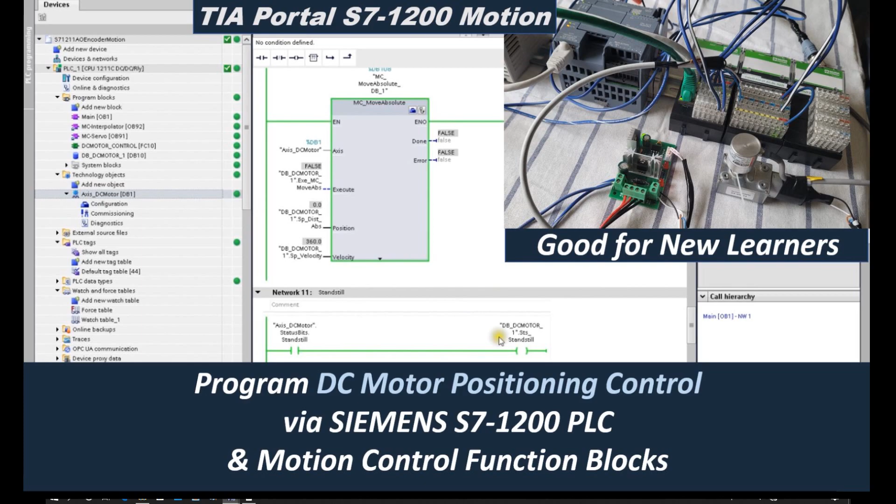By using the analog output for DC motor and encoder feedback, and I'm using the Siemens small controller S7-1200, this small controller. And in this test, we do not need any other technology, hardware, or module. We just use this S7-1200 CPU, and it has a built-in HSC high-speed counter. And we are using the analog output to control the DC motor.

So in the previous video, I used around 10 to 20 minutes to explain how this hardware looks and how we quickly build up this axis, this hardware configuration. And I'm using this analog QW100, one channel, 0 to 10 volts, and this analog signal goes to the PWM driver board. And the driver board connects to the DC motor.

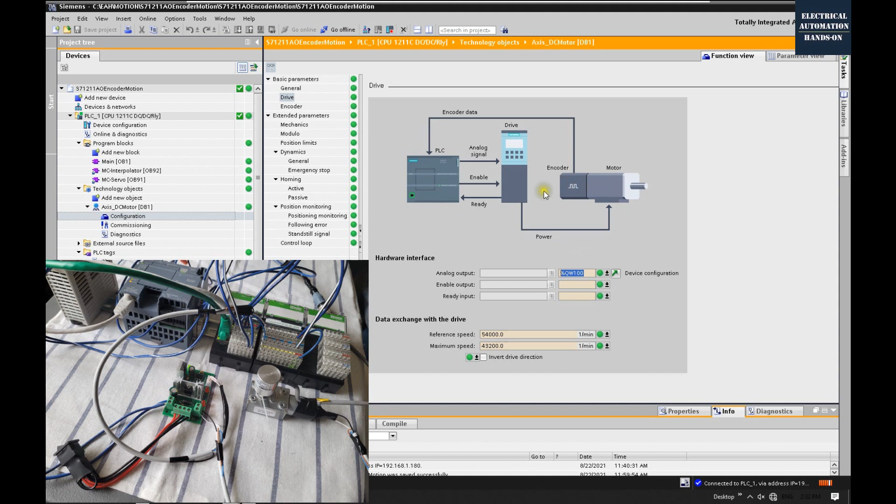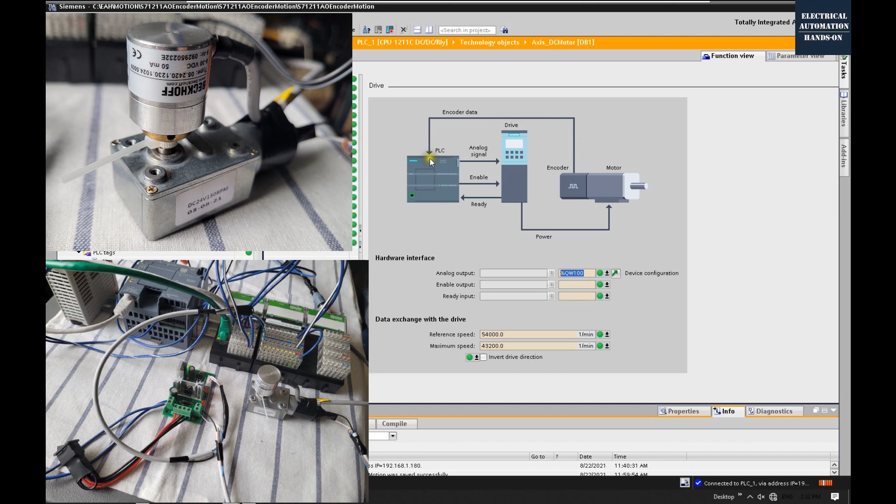And then to measure the speed and the position, I'm using a very simple incremental encoder. And I'm using A and B, two channels connected to two digital inputs of the PLC. And to read the encoder value, I'm using the HSC1. I set the encoder as A and B counter, using input 0.1 and 0.0, A and B, two channels. And I can read the speed and the position.

Also, I briefly showed how we can tune the gain parameter. That time, initially we started from 10, increased to 40, and then went back to 38 or 36. So basically, we briefly and quickly set up this closed loop positioning control.

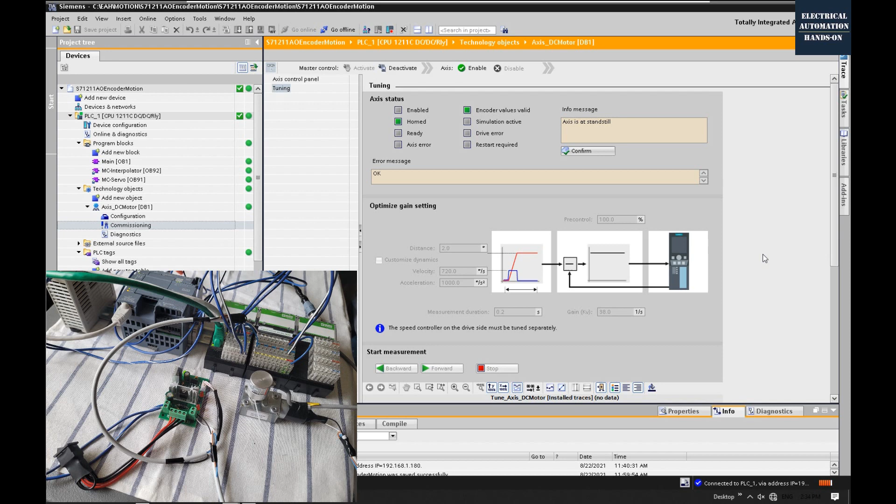And if you have this controller at home or in your shop, you can quickly build up this controller and DC motor system, or maybe you have a VFD in hand and you can use the same idea: analog output connected to the VFD, use the induction motor, and use the encoder to read the induction motor position feedback after the gearbox or after the shaft, right? So you can quickly build up this positioning control.

And after we build up this axis configuration, and after we use this control panel to jog and do relative or absolute positioning control of this motor, we verify if the motor can travel in the correct direction and to the correct position as well as the velocity. Then we can use MC function blocks to enable, home and jog as well as velocity control or positioning control. So we will use the program.

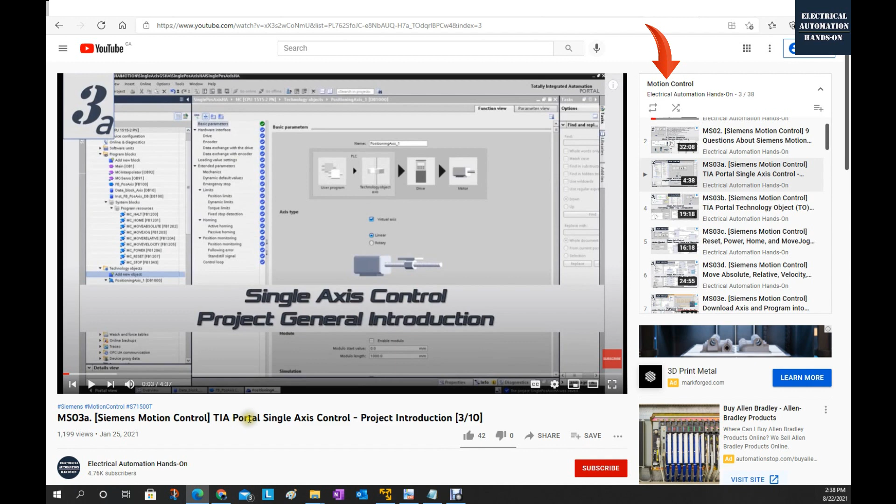And in this video, I will briefly show how we can do that. Actually, I made one video before that shows in detail how we can set up the function blocks. I explained it in detail. In this playlist, I have almost 40 videos. It includes Siemens motion control, Allen Bradley motion control, and Beckhoff TwinCAT motion control.

If you are a new learner trying to get a rough idea of how we can use the Siemens small controller to set up closed loop motion control, this video is a good fit for you because I will briefly introduce how we can do that, step by step, hands-on. Alright, let's go step by step.

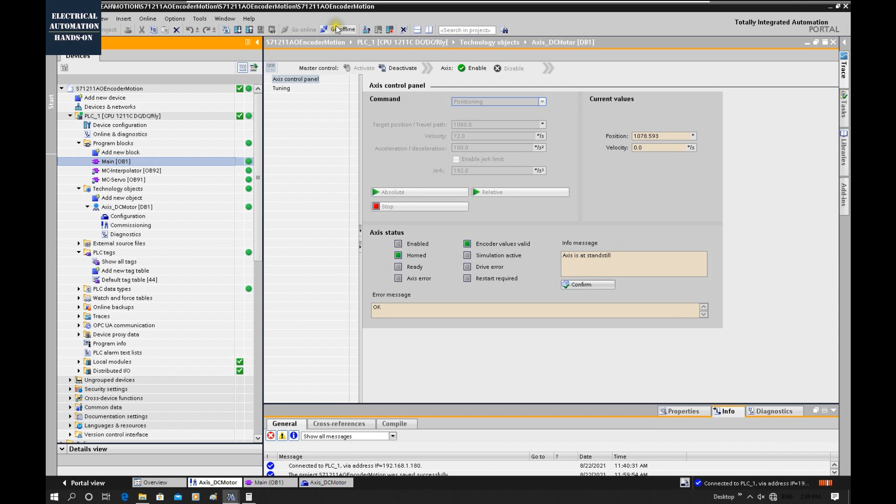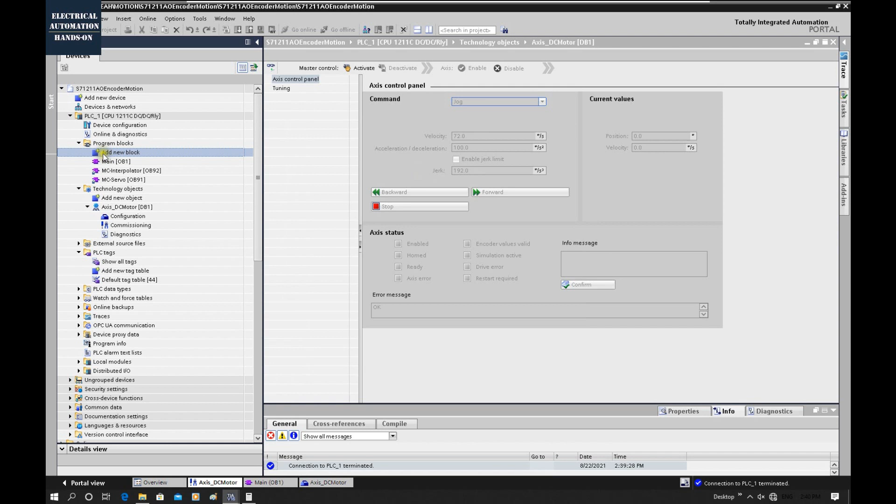So go back to our project. Let's go offline first. And let me first set up one FC. We can quickly set this up. Name it DC motor control. Okay. This is the FC. Okay, we set up this FC, and don't forget to call this FC from OB1.

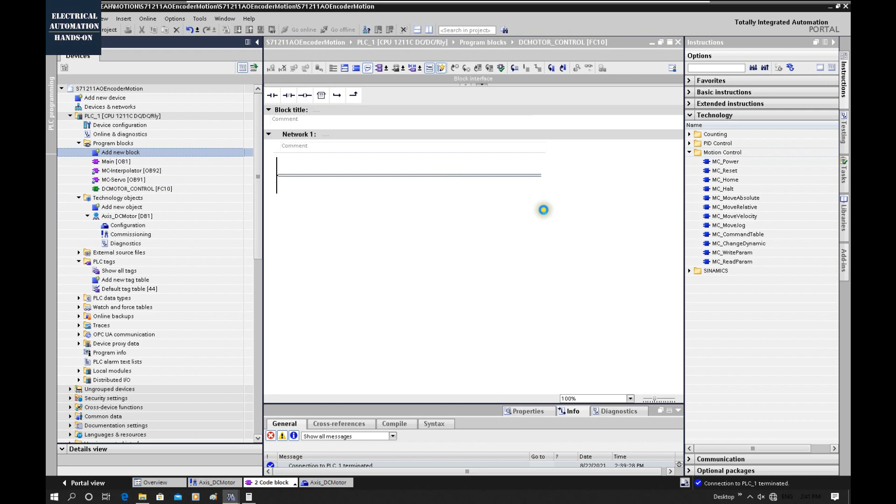Okay, our main function blocks, MC function blocks, will be called from this corner, Technology, and the drop down list, Motion Control. All those function blocks will be called within this FC. Before we start to program MC function blocks, let's create a DB. Inside the data block, it includes all the tags we will use. So we can add a new block and click this data block.

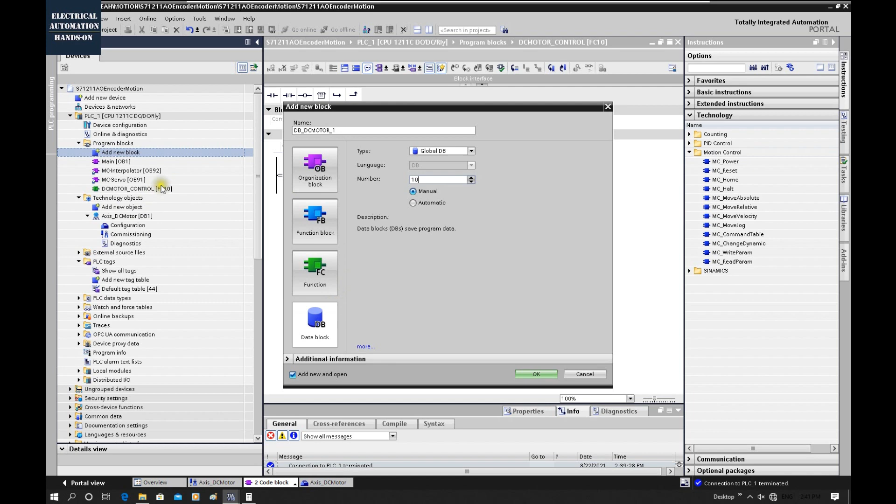We can name that DB underscore DC motor 1. Okay. Probably we have multiple motors, so we start from 1. And the number, we can also start from 10. This is the DB, so they can use the same number. FC is FC, DB is DB. And inside this DB, we can create multiple variables. Okay, so here I can declare the variable name. Let's prepare the tag and the variable names first.

Firstly, I will name that execute MC reset, and then execute MC power. And those are the commands to trigger the function blocks. Okay, and then let's put the set point data. For example, what the velocity value, what the position value, right? We can name that set point velocity.

And keep in mind, for the 1200 controller, the real value is using Real. For the 1500, it's using LReal, so we need to type in LReal. So for the 1200, it's using Real. Okay, set point velocity, and here let's set set point distance relative.

Okay, and set point distance absolute. Then we need some status. So for example, status of standstill. That is the bool signal. This represents to check if the motor is at standstill status without any moving, right? And then we can declare the MC error. So this is a summary to show if this axis has an error.

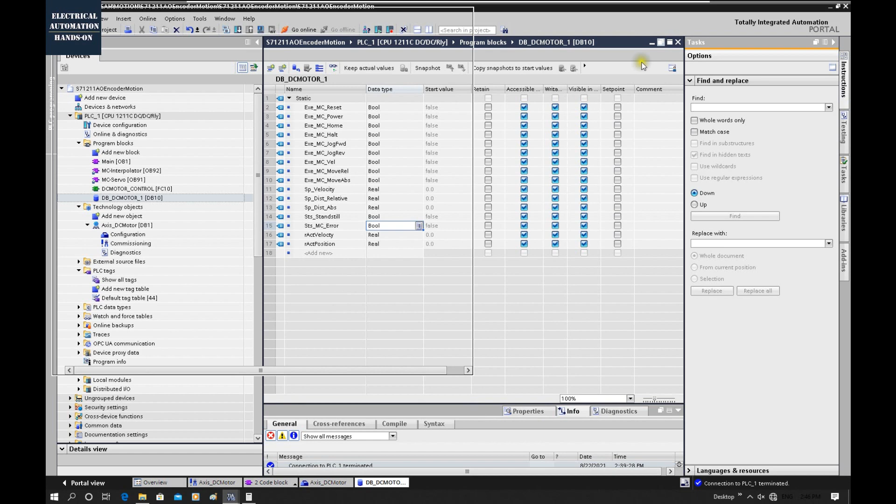These are very key and core variables. Actually, in the actual case, you probably need to declare more than this, but those are the essential variables. That's enough for us to do a quick or simple test. Okay, so after we declare this, we can drop it into this corner. Okay, and then go back to the FC10 from the network here.

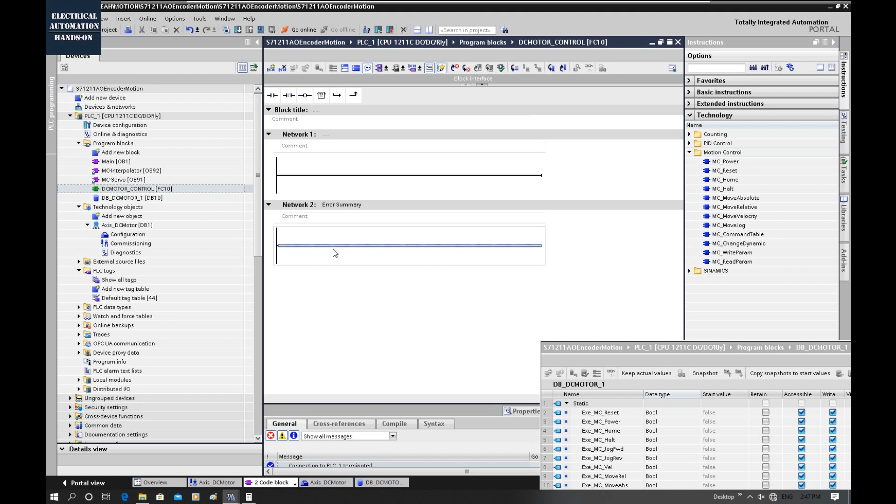So let's start from the second network. Right click this, add new network. And let's firstly declare the error summary. This is very important because for every trigger, especially for the power on for the motor, we need to guarantee there's no error in the system so we can power up the motor, right? So the result will be this from our DB, this status MC error.

So I can drag this tag to here. This is the beauty of the TIA Portal. So we can drag and drop. And we need to grab some important values. For example, the axis is this, DB1, right? So let me firstly drag this axis here. And then we press the dot, so it can show the variables within this axis structure.

So we need to grab some important status. For example, these error bits and this following error, and some status from the axis. So let me pick the error bit. Within this error bit, it has communication fault, configuration fault, drive fault, following error, sensor fault, and system fault, right? So for example, I need to pick the system fault and do the parallel logic.

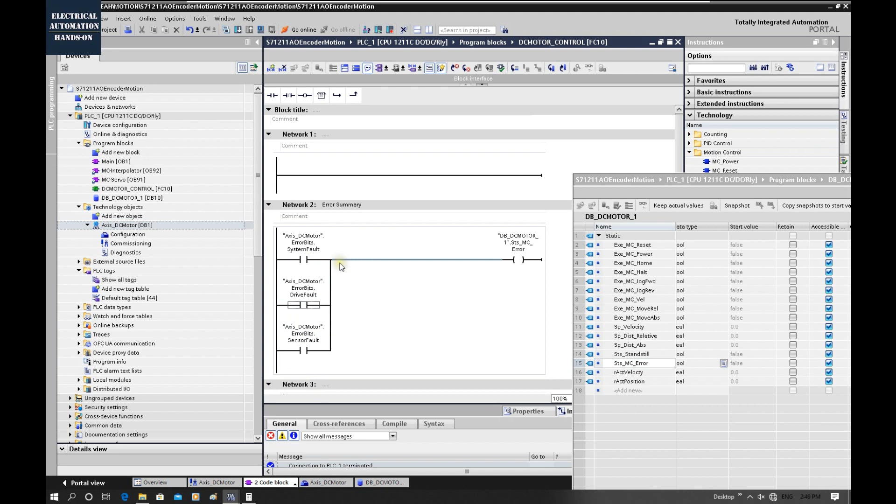So system fault, drive fault, and sensor fault. Those are very important. You can also pick others associated with your system application, but those are the essential. So if one of them turns on, that means the system has an error. And then next one, we can call MC reset.

We can drag the MC reset function block from the right side, motion control, MC reset. I can start from 101. So MC reset DB for axis 1, so I can add this _1. Let's create this as a single instance. This video is especially for the new learner, so I won't create multiple instances. I try to set it up in a very regular way.

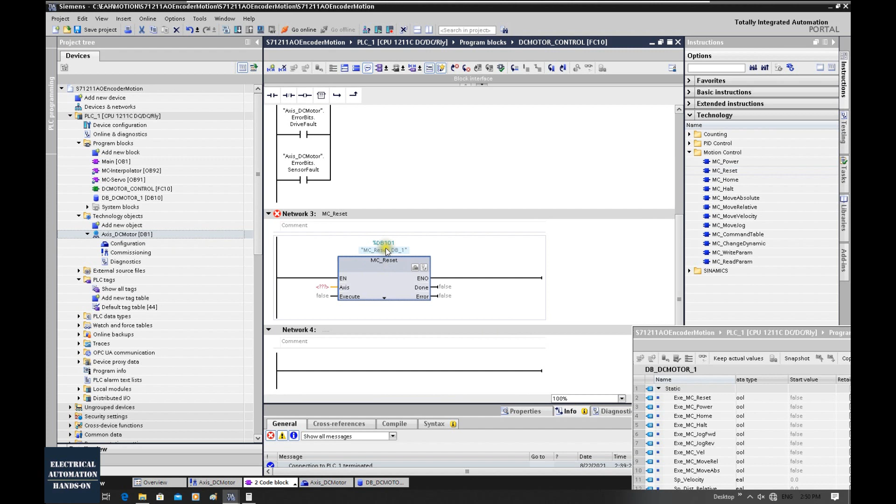Okay, so named 101, the MC reset. So it automatically creates this DB101. And where is this background DB101? They are located under the system blocks here. We do not need to change or organize that. Basically, let the system automatically organize its system blocks. And then we can drag the bool signal to execute this MC reset.

Find the DB variable we created, and drag it here, reset. And this axis is very important. That lets the program know, when we trigger this MC reset, which motor or which axis it should reset the fault for, right? So our target is this. How to connect them? Very simple. Also drag and drop. Drag this DB1, drop it here, release. And that's it. So this MC_reset knows it's operating this DB1, the DC motor axis.

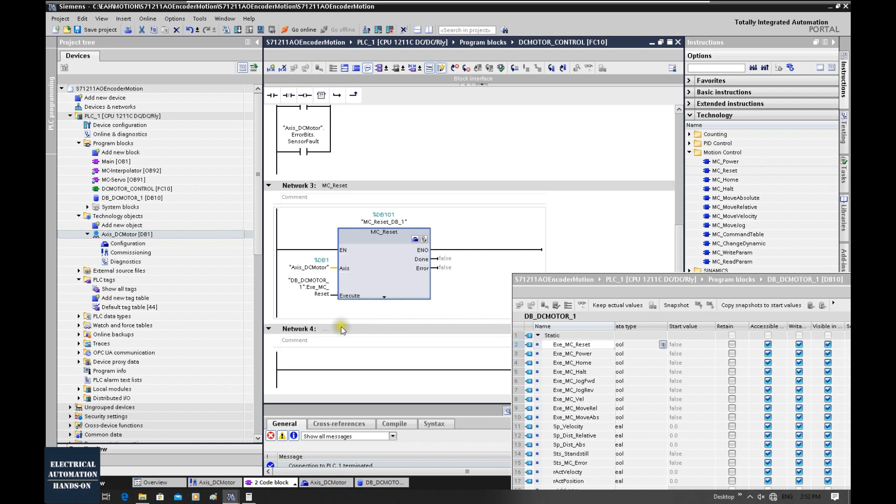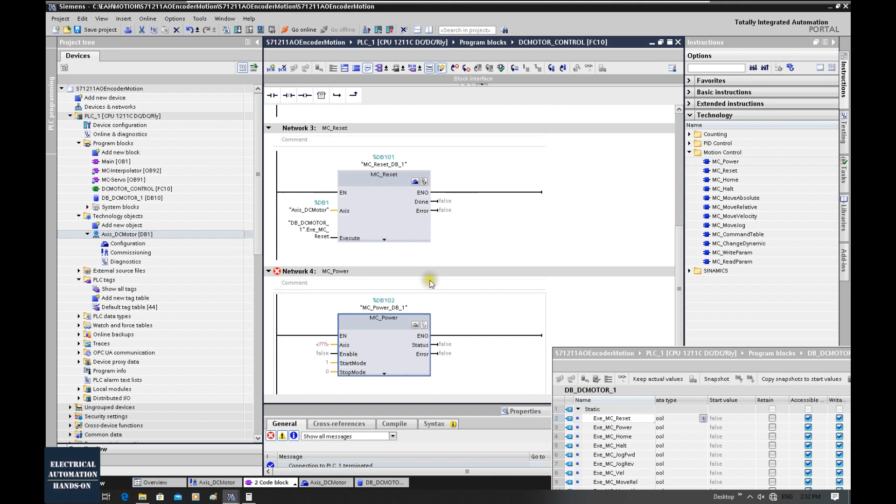Okay, this is MC reset. The next one is MC power. We will use this function block to power up this axis. So we will use the MC power, drag to here, and same thing, we will start from 102 and add a _1. And same thing, the axis we will operate, drag to here. And enable is very important. We will use this enable for the power command.

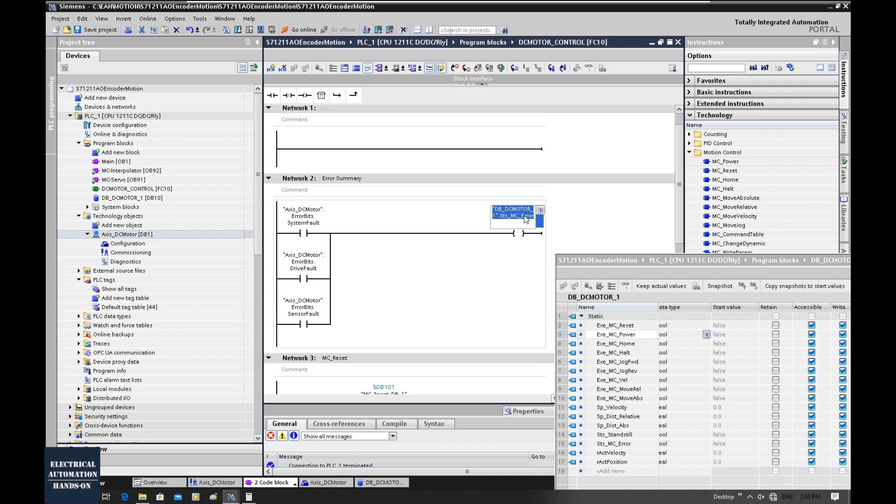And other than this command, we also need to consider if the system has an error, right? So we can copy this, and we need the system without error, so we need this negative logic. And once you turn on this power, it will turn on. All right. So next, this is the MC home. We can directly set the value for the axis using this function block. Let's drag the MC home. Same thing, we will use 103.

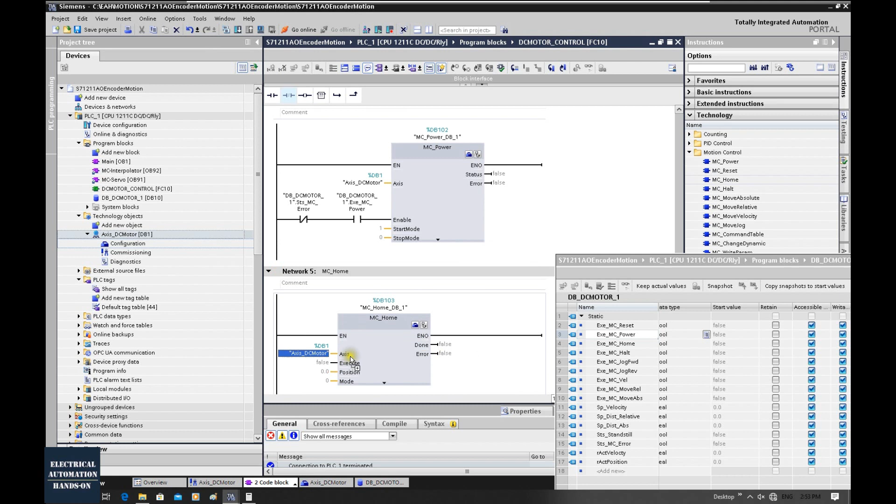Okay, and drag this axis and execute. We will use MC home execute. And this value allows us to directly set the value we set here. Usually by default, we will set the 0 value when we execute the home, or we will run the automatic go home. So basically by default, very simple function, once we trigger this function block, we set a 0, this value setting to the axis. For this purpose, we will set default value 0 mode on this MC home.

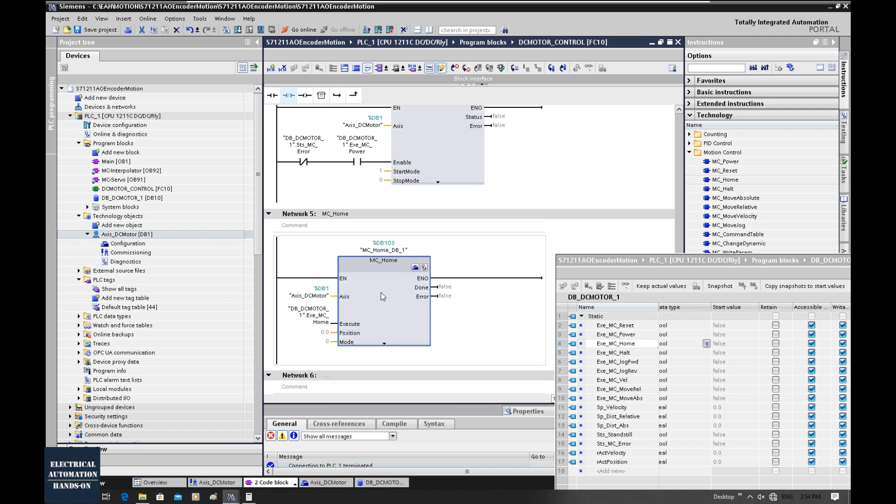If you want to check out the MC home, it is a little bit complex topic. So if you want to read the detail, you can click F1 to find out the help for this MC home. Okay, we can see mode 0, that allows us to directly home the axis. So especially for here, mode 0, we directly home the axis, set the value directly to the axis. Okay, this is MC home.

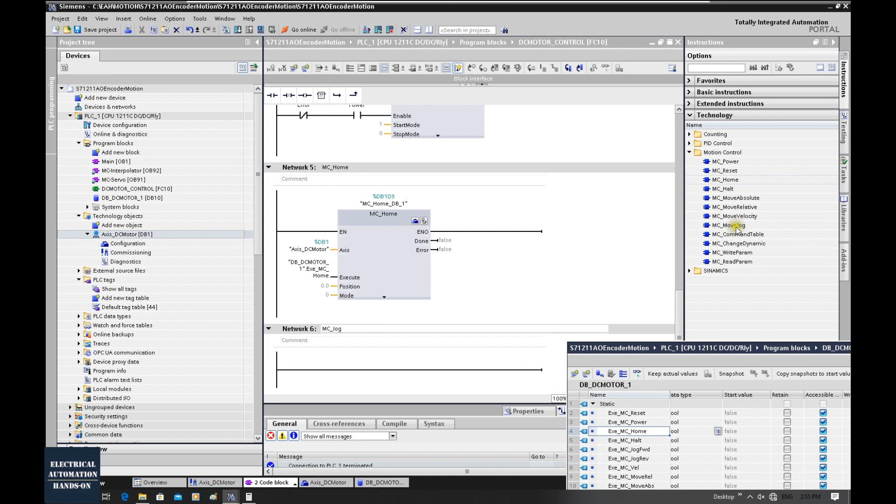Next one, also important, that's the jog. That allows us to manually control the axis. We can jog forward or jog backward. Manually move the axis, manually move the DC motor, right? So we can drag the jog, MC jog. Okay, we can drag this axis here. Forward, reverse, they are individual bools.

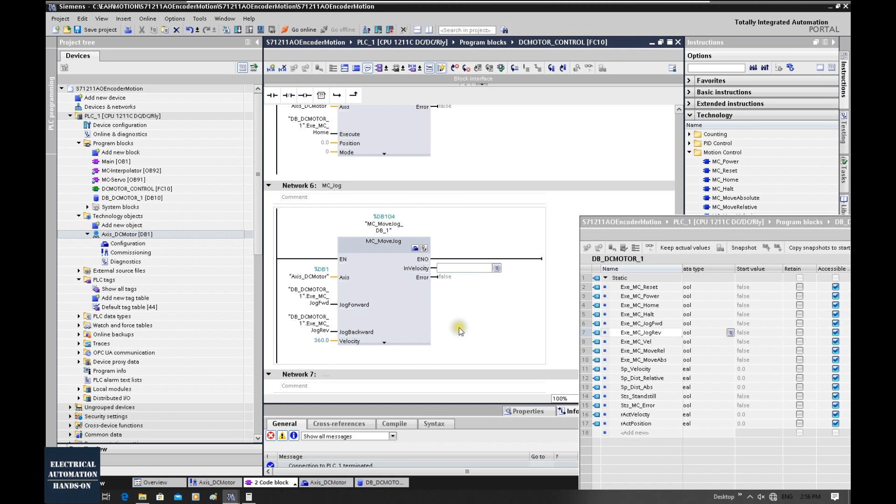And here, that's the velocity. If you recall from the last video, we used 1 revolution per second. So at that speed, we need to run 360 degrees. So the velocity per second, that is 360. Every second, we run 1 revolution, right? So that's why we set 360 here. We can also use another variable, that's the real value. So if you leave the mouse here, it will show you which kind of data type. The real, we can type in here, we can input here. Okay, this is MC jog.

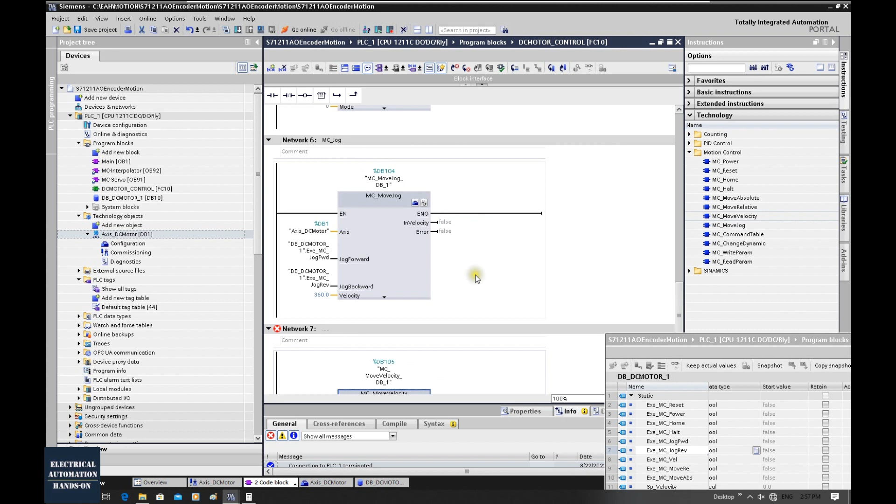And then we can drag the three main motion control commands: velocity, relative move, or absolute move. So move velocity. And we can use the number 105. Okay. All right. The axis, same thing. Drag this axis and drag the execute move velocity. And which kind of speed we will run? Let's run a little bit faster. For example, 720. And that's it. This is a speed setting here. And once we trigger this, the axis will start to move.

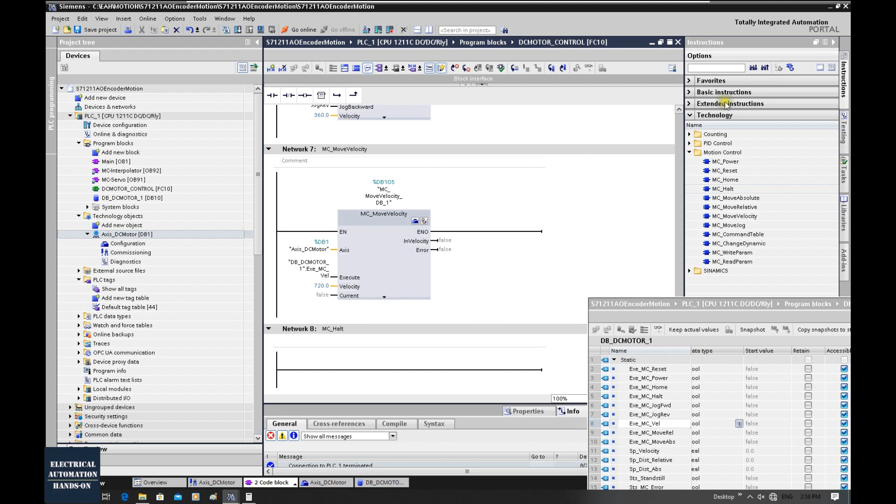But how can we stop the axis? So this move velocity is used to trigger the axis to start to move at a certain speed you set here. But how can we stop the axis? We will use the stop command, or we call the Halt command. So we need to drag this MC Halt. So Halt 106. Keep in mind those numbers cannot overlap. So MC Halt is very simple. Once we trigger this, the axis will try to stop. So we need a trigger signal, MC Halt.

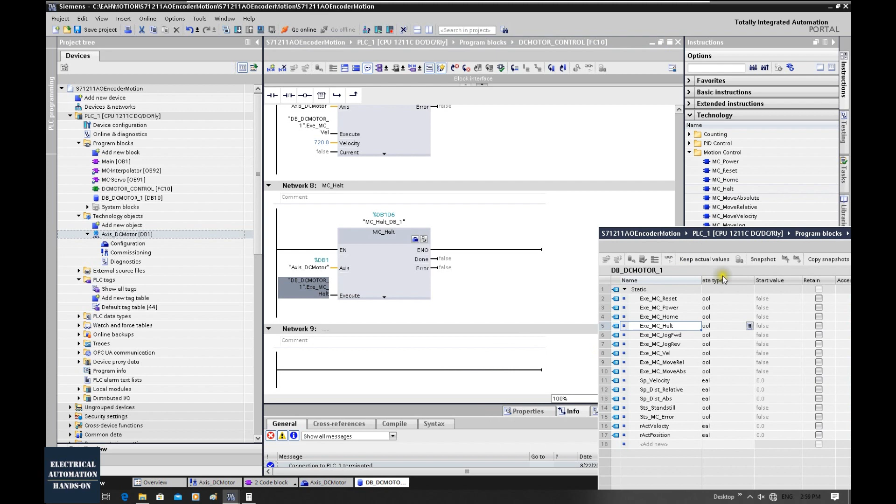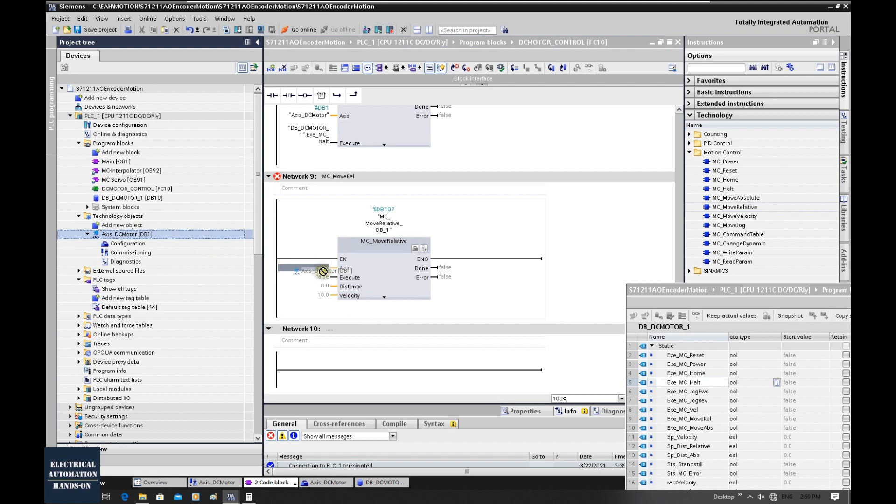Okay, and then the two common function blocks. Usually for automatic axis control, we will use MC move relative or MC move absolute. Okay, let's first program this move relative. Every time we trigger, this axis will travel a certain distance. Okay, this is MC move relative. Same thing, the axis and the trigger Exe_MC_MoveRel. And the distance we can set here, so we create this setpoint distance relative and setpoint distance absolute. We can drag this real data type to here. And this velocity, we can set here. Okay, this is the velocity setting.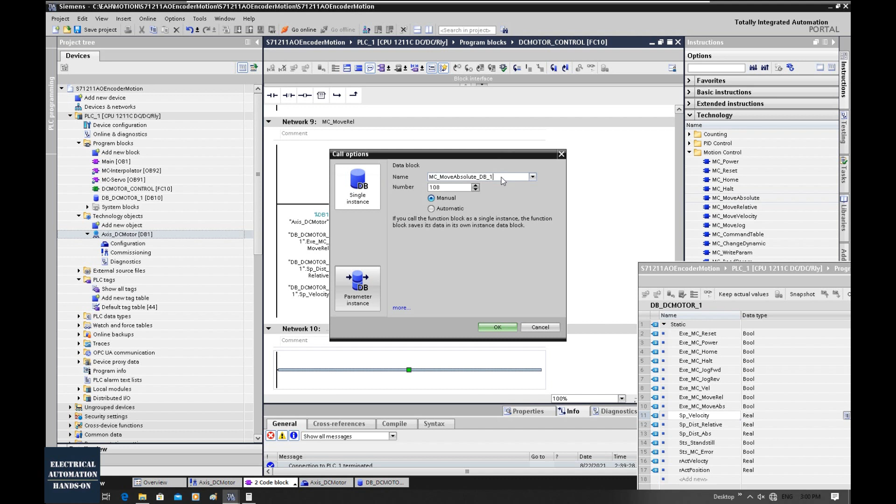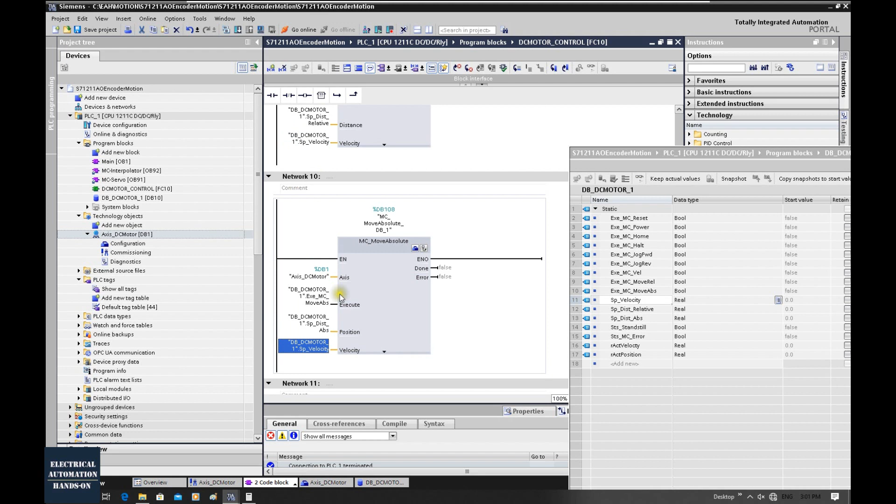And then let's drag the MC move absolute. Okay, this time we name 108. Move absolute DB underscore 1. Okay, same idea, drag this axis first and trigger from the bool move absolute. And for the position, the target position, we will use the setpoint distance absolute. Okay, and the velocity, we will use the same input. We could use a different variable, but just for simple demonstration we will use the same. Here, that's the MC underscore move absolute.

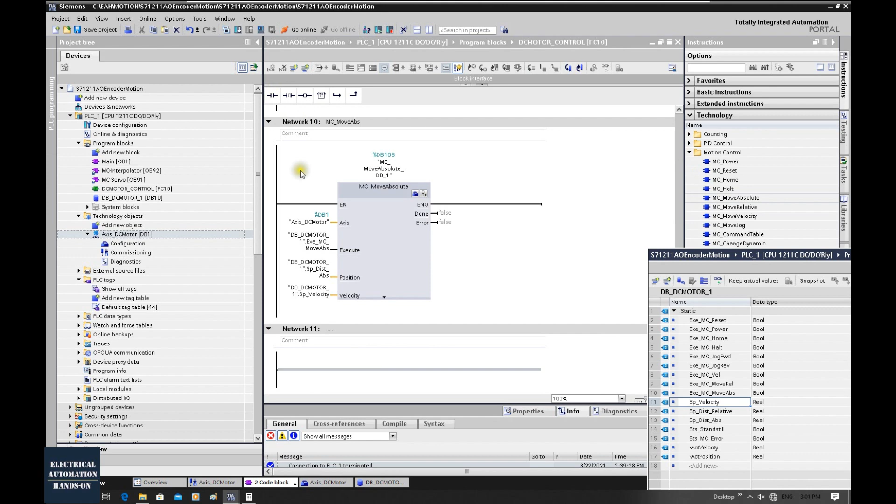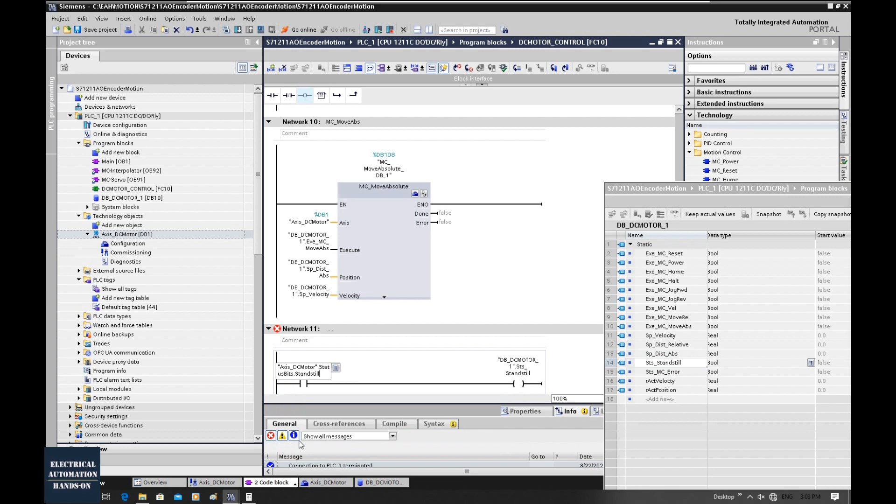Okay, and then eventually we will grab three important status variables. So firstly, that is standstill. The standstill will grab one variable from the axis and transfer it to status standstill. Okay, where does this standstill come from? That comes from our axis. So same thing, drag this axis here and press the dot. We need to find the status bits. Within these bits, there's one signal named standstill. Okay, standstill here. Then we will read the actual velocity and the actual position from this axis.

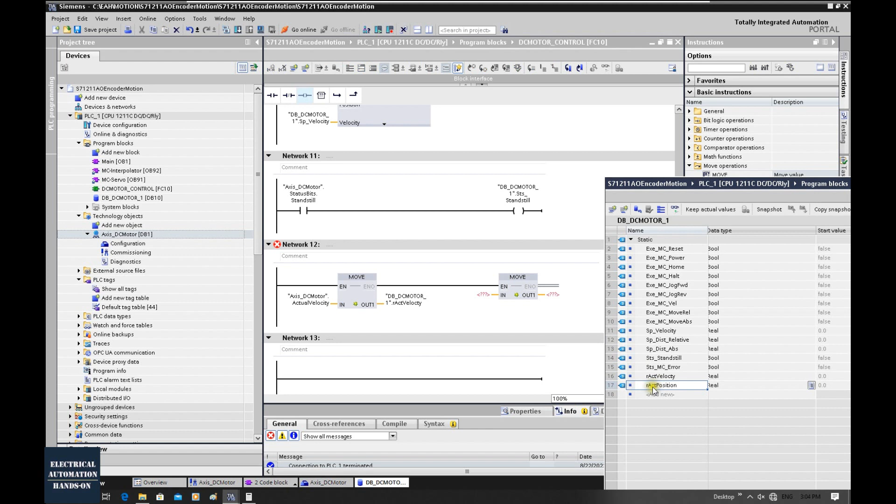So we will use the move instruction. Okay, find the basic instructions, find the move operation, move. So let's drag this axis here and same thing, press dot. Let's find the actual velocity. Copy the actual velocity from the axis to our DB. And same thing, we can copy the second move. And this time the target is the actual position. So we drag the axis again, press dot, the actual position. So we can read the actual position from the axis. Put the velocity and the position here. And this is standstill.

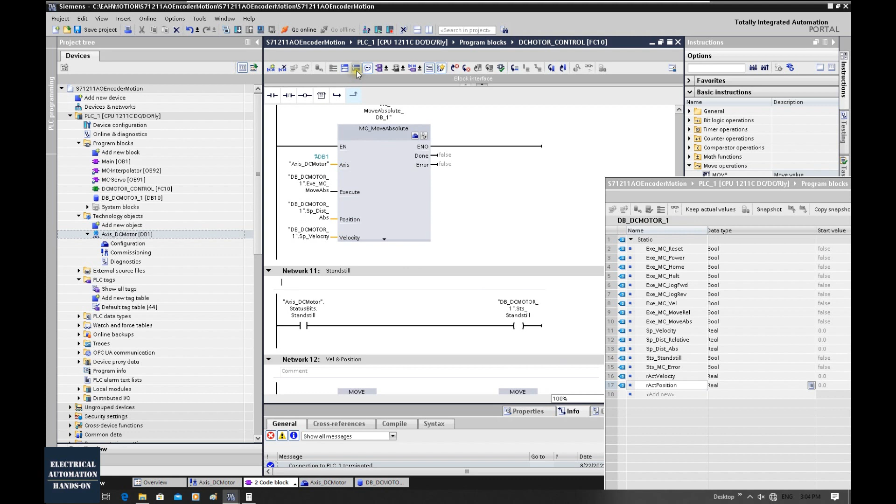You will ask, why do I put comments here every time? Because you will see the beauty of this once you close all the networks. So from this shrunk view, you can quickly know what every network is doing.

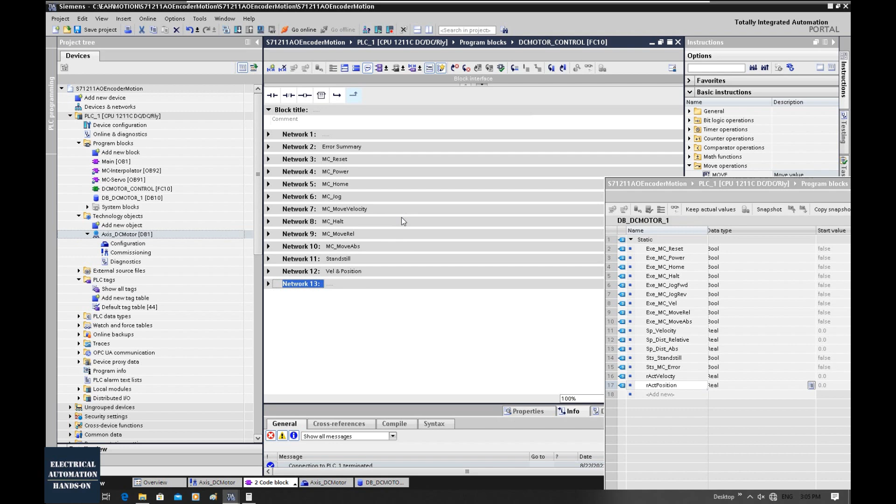So for troubleshooting, you can quickly direct to where the problem is located, right? For example, if you try to find this move velocity, you can quickly find out where it is. Without those comments, every network will show like this. So if you have 20 networks, you don't know which network is doing what. You can also click this open all networks. We can look at the details here.

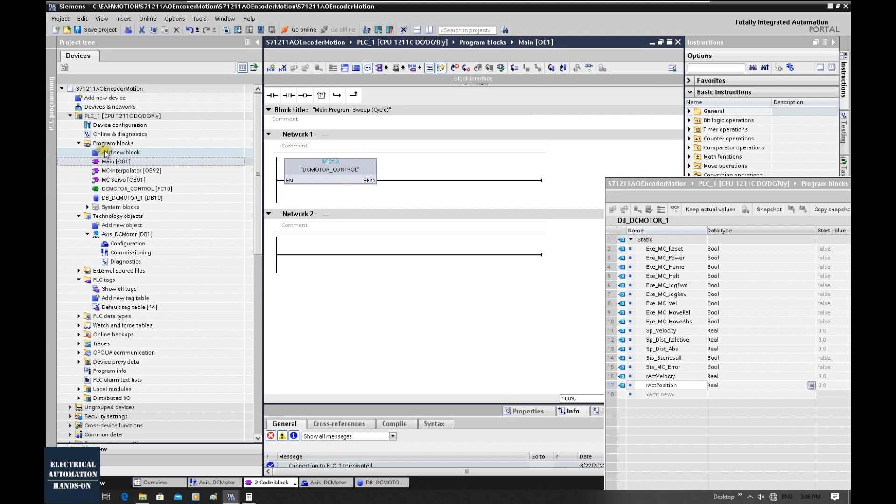All right, so we quickly built up those function blocks, and keep in mind all those function blocks are located within this FC10. And then from this OB1, we call this FC10 here. Okay, so then we can download our program. All right, so we download, and then we can click online. Once we see all green, that means offline and online match.

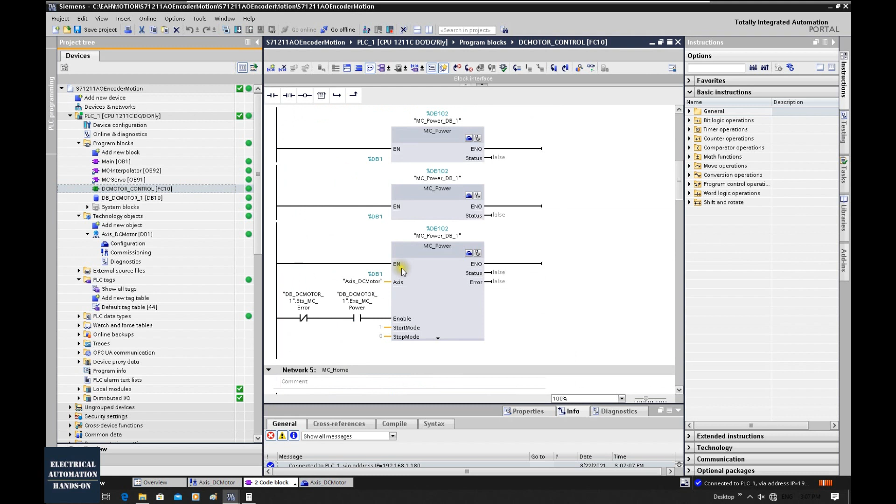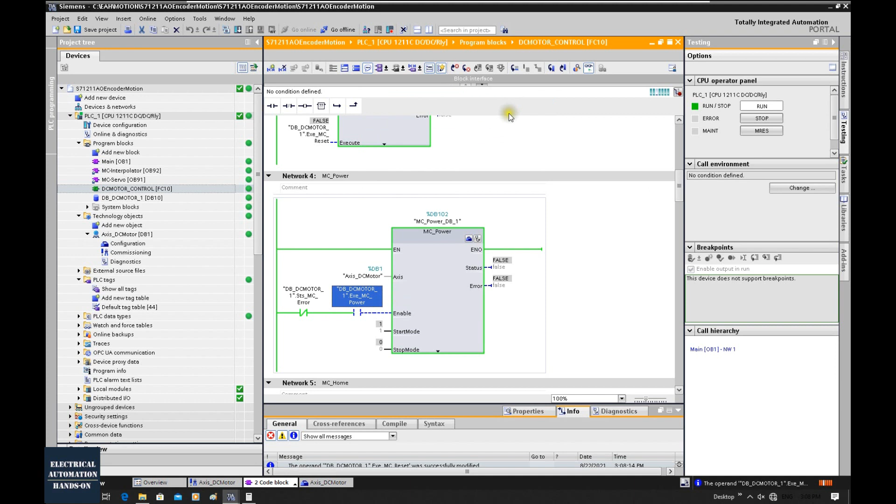And then for the commissioning, we can open the FC10. And then we can click online, monitor all. Firstly, we can trigger the MC Reset to reset all the faults. Okay. And then we can power on the motor. So now without any error, we can power on. Keep in mind, we need to leave enable on for this MC Power. So without any error, now we power up.

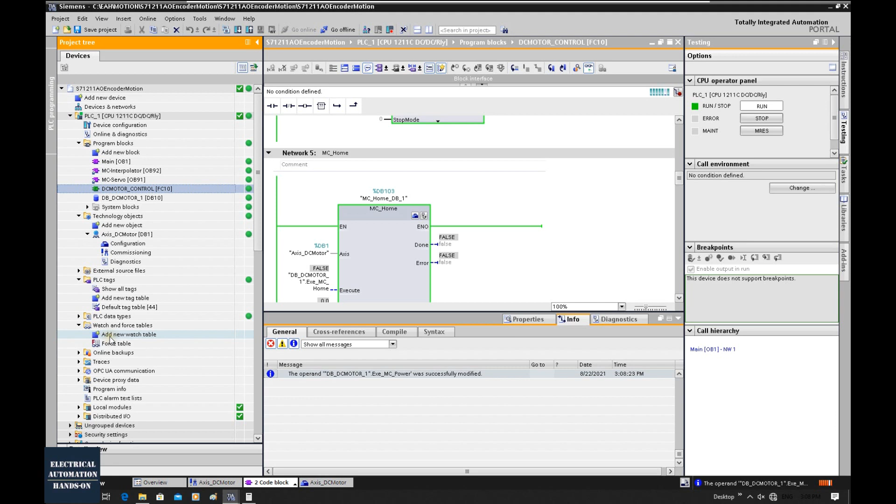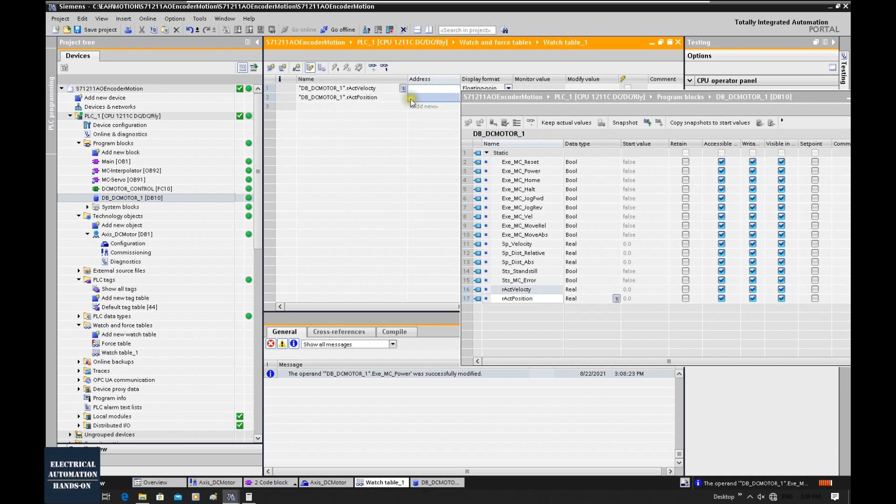Also, to check the current position and velocity, we can use the watch table. Okay, let's add one watch table. This watch table allows us to monitor the variables. And then we can open the DB10. This will show all the variables, right? And we can drag the actual velocity and the actual position here. Drag them here and click monitor. Okay, we can monitor the current position and the current velocity.

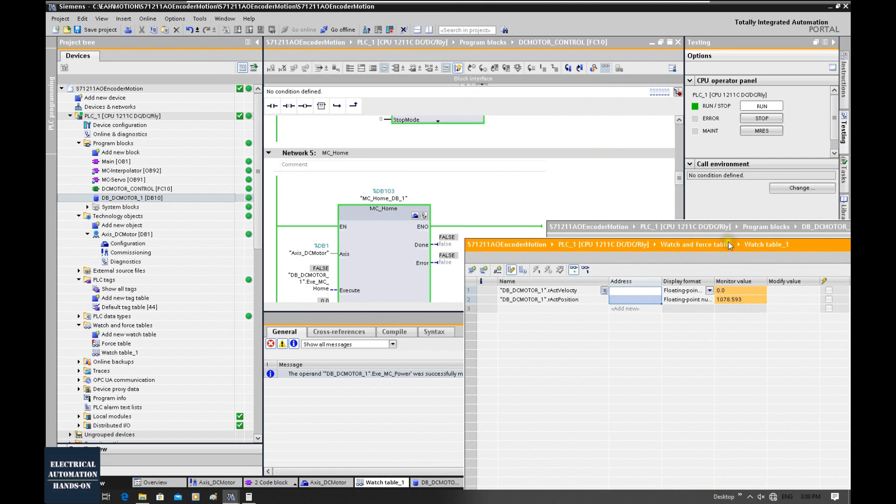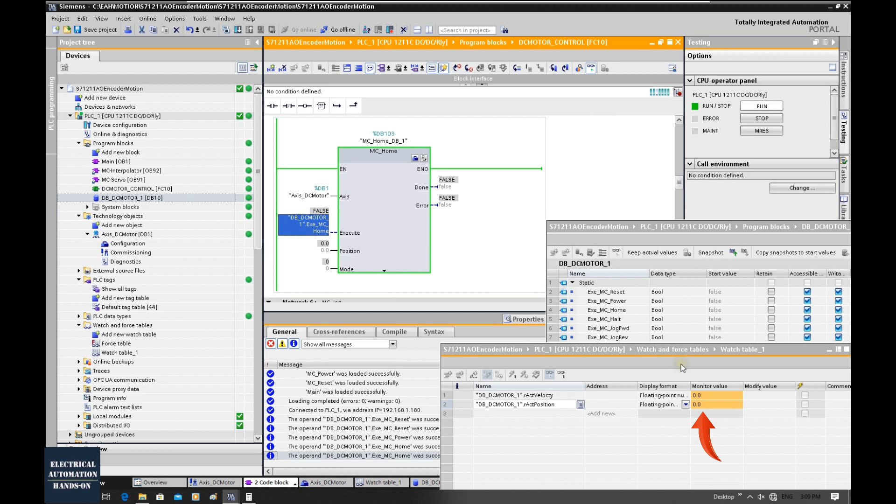And now, since I tested the values in the previous video, we can home this axis. To home this axis, we can execute this execute command. We set 0 directly to this axis actual position. Now I can trigger. See, once I trigger this on, it sets this 0 setting to this axis. Now we've homed the axis, and we can manually move this motor forward or backward.

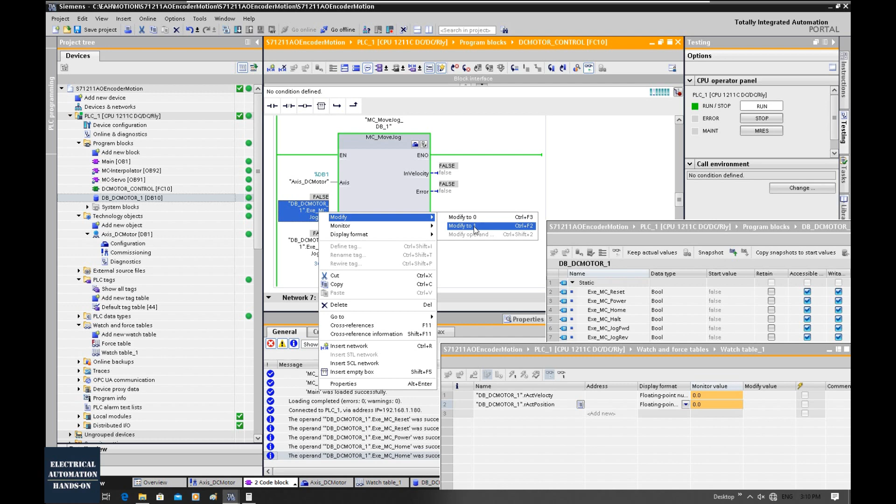So let me try the forward. This will basically be used as the manual mode. We use 2 buttons on the HMI, a very simple function. So we can trigger. It will move the motor forward with a slow speed. Basically, this slow speed is set here with a slow setting. Okay. Now we can turn it on. We can see the motor is running.

Okay. And the setting is 360. So with the setting here, we can see the actual velocity. Since this is a DC motor and my PWM module is not quite linearized, the velocity will show vibrating here, but you can imagine the speed is roughly around 360. After all, this test system is very simple and poor, but it's very useful to demonstrate how this hardware system works, right? And this actual position is running.

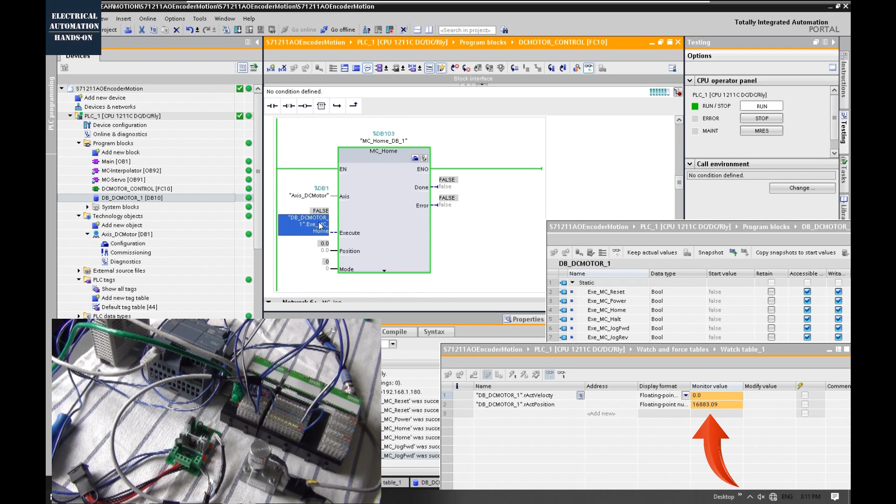Okay. Also, we can verify the direction and whether the encoder is working properly now. If I release this button, that releases the command, so the motor will stop. This is the jog function. Okay, let's home that again. Now I'm going to test the velocity. So let's trigger this home execute. Okay, we'll home this axis again.

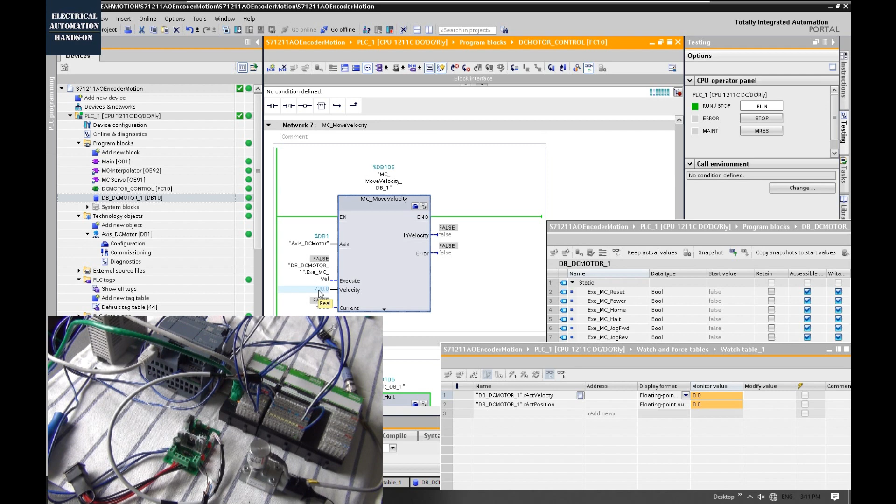And now I will use the MC Move Velocity. Okay, so my setting is 720 degrees per second. That means every second it will run 2 revolutions. So I will trigger that, and the motor will start to run. As you can see, it will keep traveling. If I turn this off, we can see the motor will keep running because this is move velocity.

The only way we can stop the axis, stop the motor, is to execute this MC Halt to stop the axis. Okay, now I can stop the axis. Before that, we can see this is the speed and this is the position. The motor is running. And now I can halt the motor. So once I trigger, boom, it stopped. Velocity 0 and it stops there. Okay, this is MC Halt.

And then let me demonstrate the move relative. Before that, let me zero the axis so we can see the value there. And now let's go to the home. So let me trigger this. To operate this more easily, we can drag this execute command here. We can also monitor that. Before that, I can also insert a row here. So we know this is the position we are monitoring, and this is the command we can trigger.

Okay, so to trigger this, I can right click here, modify to 1. So click this icon. So we set 1. Then we will see actual position equal to 0. Don't forget to reset that to 0. Okay, transfer the value, modify. All right, this is the monitor, this is the modify.

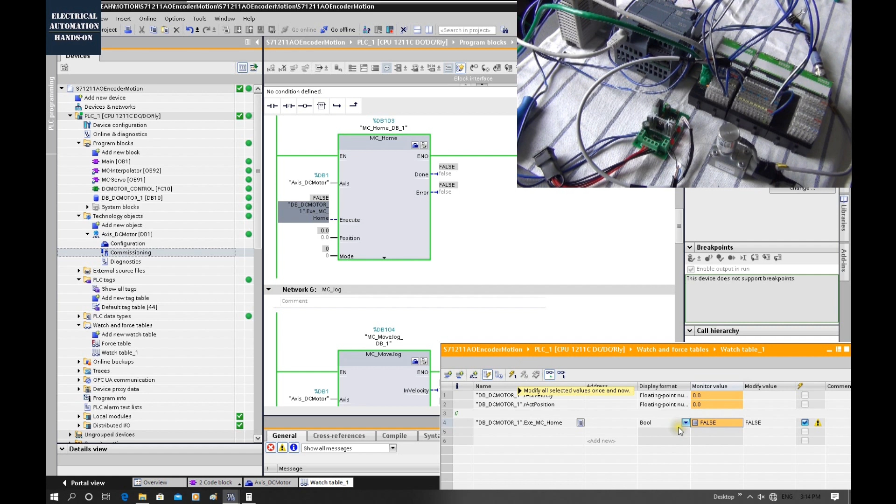And now we can test the move relative. Firstly, let me set the distance target. For example, I can set target 1000 degrees. Or let's set 3 circles. 3 circles is 1080, 3 times 360, right? Okay, we will see the motor run 3 revolutions.

And the velocity, let's run a slow speed, 360. This is 360 degrees per second, okay? And then we can trigger this command. Meantime, we can monitor whether the motor runs 3 revolutions.

The key point for this video is to show how this function block runs. For the move relative, once I trigger it again, it will keep going. Every time I trigger, it will travel 1080 degrees. So for example, now if I trigger it again, it will travel 3 revolutions to the next position. Every time it triggers, it keeps going like this. Okay, this is the move relative.

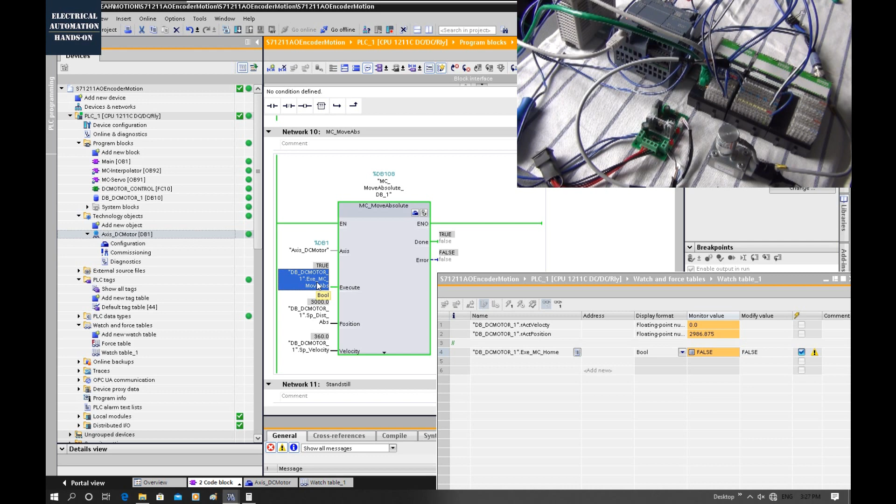Unless we change to 3000, then it will travel to the target 3000. For example, now if I trigger this command, move absolute. Okay, this is the axis target. It's trying to travel to 3000. Once it has arrived there, that's it. So this is a move absolute. Okay, and let me target 5000, and this time let's watch the standstill status.

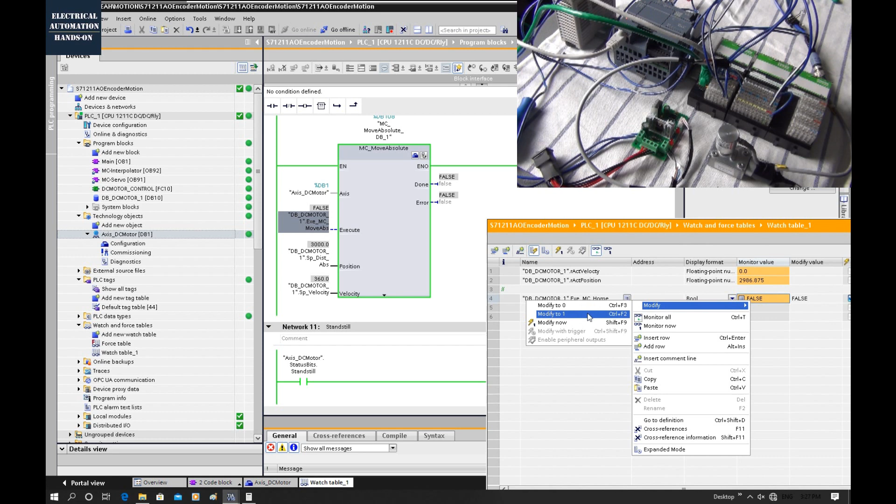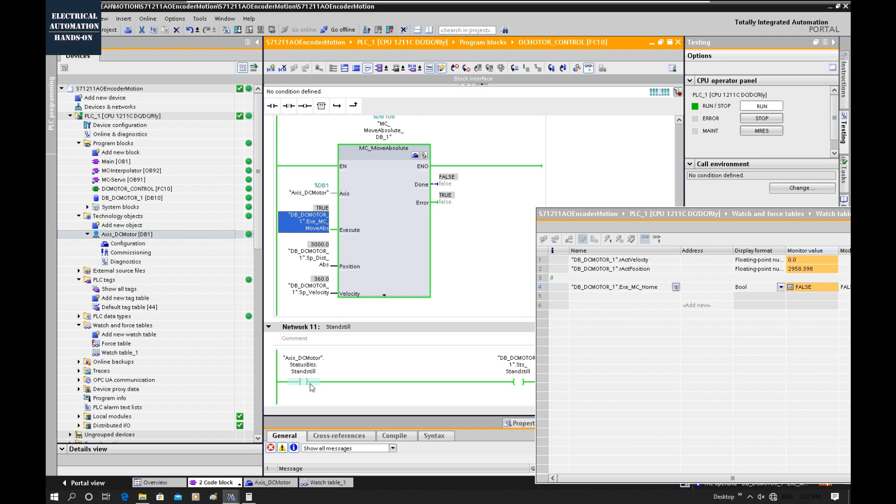Okay, if I zero this axis, now it's 0. Let's travel to 3000 and let me trigger. We can see while the motor is moving, standstill goes off, and once it has reached the target or around there, standstill is on. That means the motor stopped there without any movement. This is standstill. In the meantime, we store the actual velocity and actual position from the system, so we can read them. These are the two common status values we need to monitor from the axis.

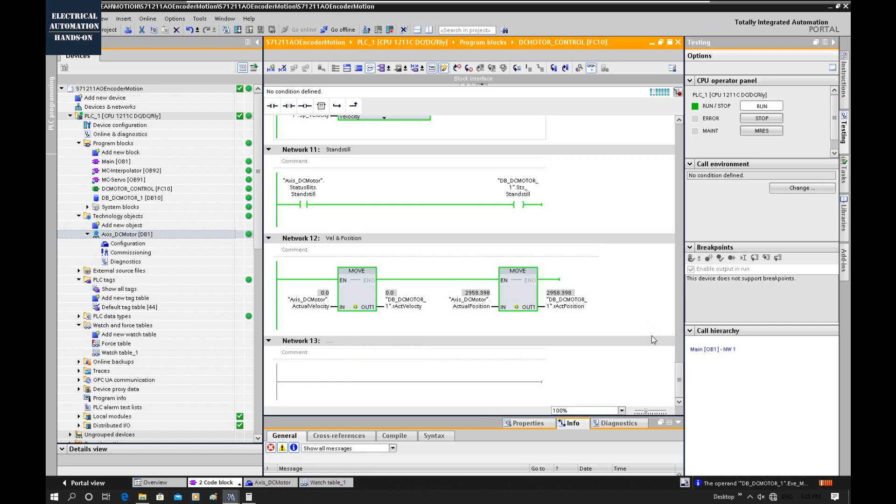Alright, that's it for today. This is a very brief and simple operation to show how we can use the MC function blocks to control this DC motor closed loop system. We used two videos to show how to quickly set this up. Basically, you could use 1 hour to set up everything and test these things. It's very simple, and I hope these two videos help you get the basic idea of how to use the Siemens 1200, a simple and cost-effective controller, to set up this closed loop motion control system.

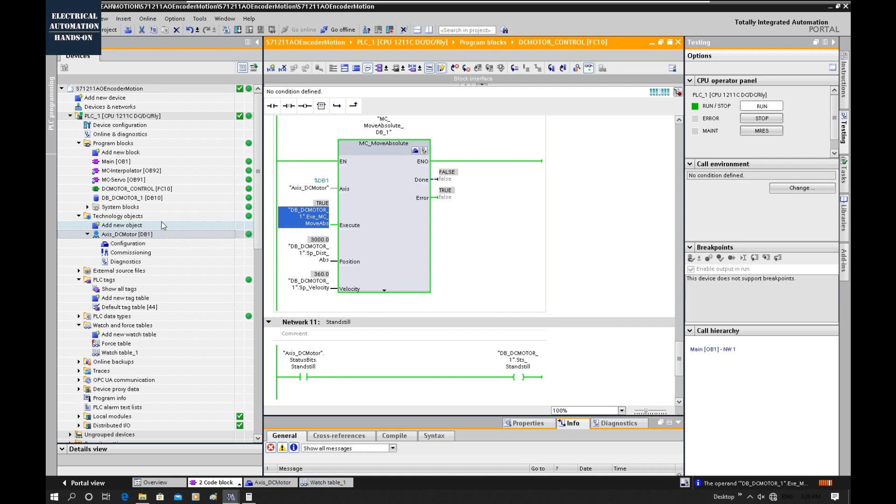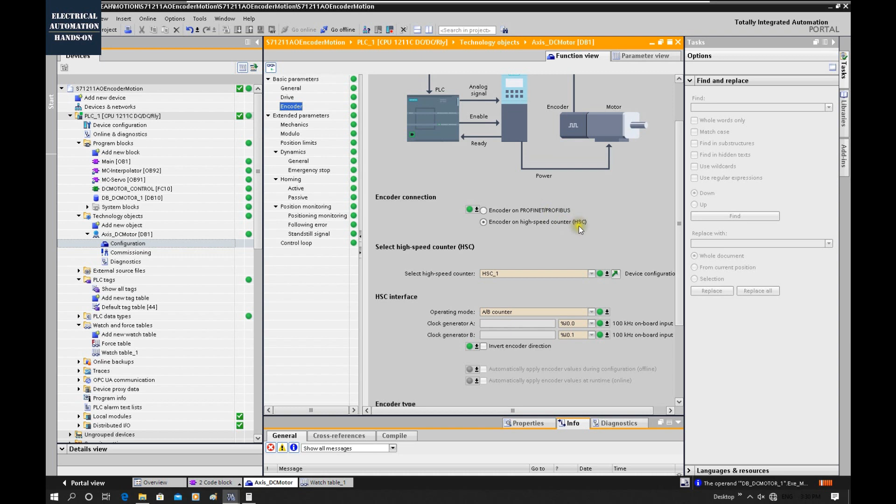Also keep in mind, since we are using axis control, once your motor system, drive system, or encoder system changes, the program and configuration behind it won't change much. So if you change from the VFD to a servo motor, the only thing you need to change is this area, right? And the encoder, you can probably read it from PROFINET or other encoders. So the only changed portion is this area and the drive area. Other areas won't change, especially the program.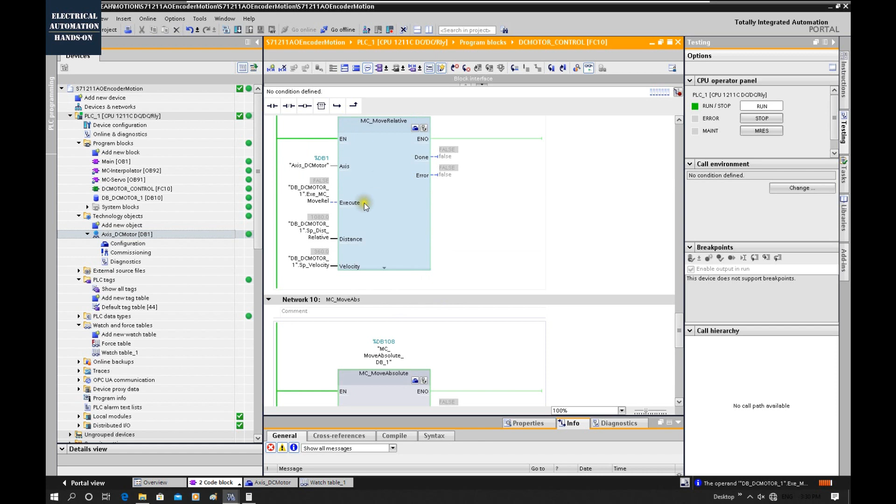The program only needs to identify which axis is operating. So if you change the hardware within this axis, the program doesn't care, which means once you build up your own motion control templates, you can use them for multiple projects. Alright, that is it for this video.